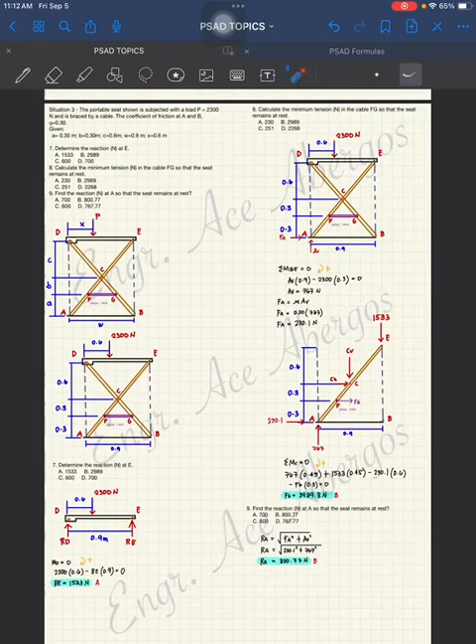Next, situation 3. The portable seat shown is subjected to load P, 2,300 newtons. It is braced by a cable, as shown in the given figure. There's a brace cable shown. The coefficient of friction at A and B are 0.30. Given values: A is 0.30 meters, B is 0.30 meters, C is 0.6 meters, W is 0.9 meters, and X is 0.6 meters. Let's plot the given values.

The questions are: first, determine the reaction at E. Calculate the minimum tension in the cable FG so that the seat remains at rest. Find the reaction at A so that the seat remains at rest.

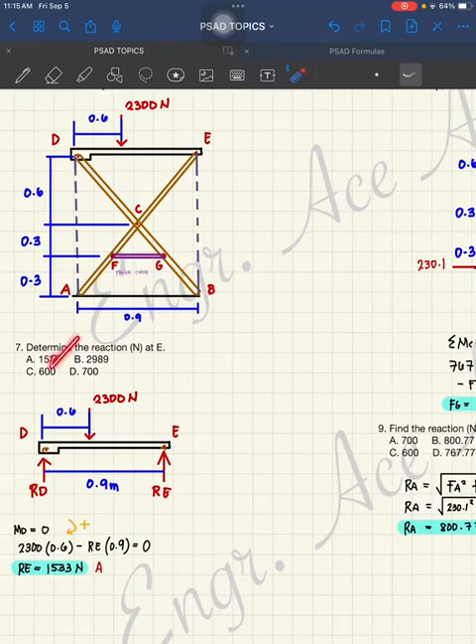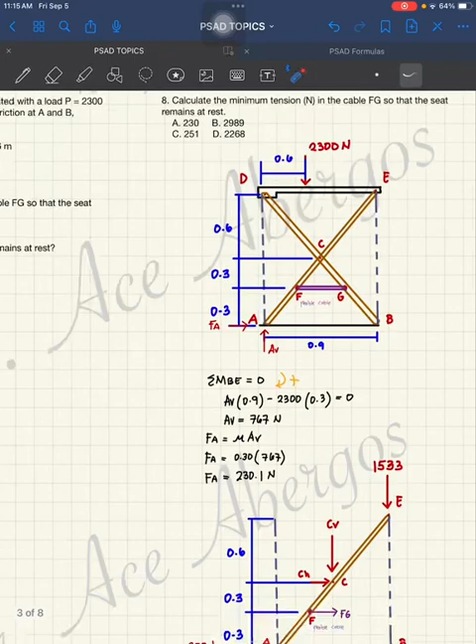Number 8: calculate the minimum tension in the cable FG so that the seat remains at rest. This means the seat must not move or spread apart, so there must be a force here, force A.

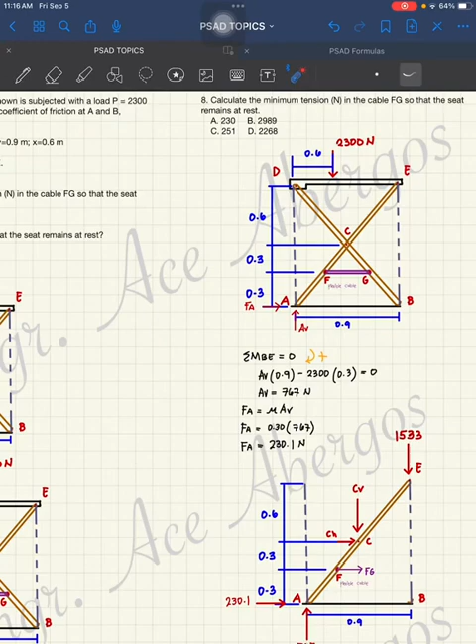Moment at BE — on this plane BE, that's where we take the moment. Clockwise is positive again: AV times 0.9, since its rotation goes clockwise toward this plane. Then minus, since counterclockwise now, 2,300 times 0.3 — why 0.3? Because 0.9 minus 0.6 equals 0.3. Equals zero.

Shift solve, we get AV equals 767 newtons. That's the force.

Now we can get FA, since mu, the coefficient of friction given, is 0.30, times AV, 767, gives us FA equals 230.1 newtons. That's our FA, from the formula F equals mu times the normal force at point A, which is this AV.

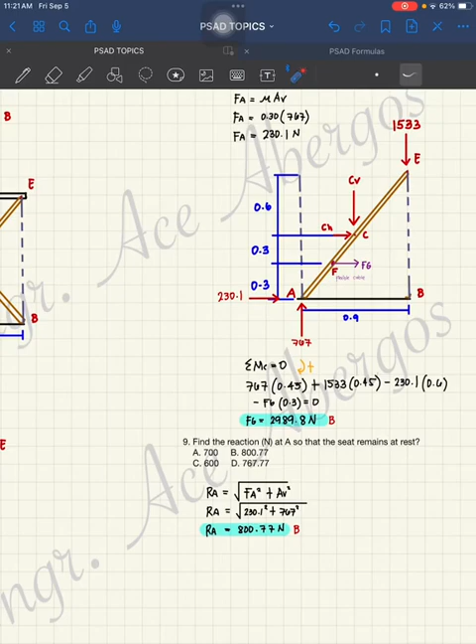RA equals square root of FA squared plus AV squared. This gives 800.77 newtons, which is letter B.